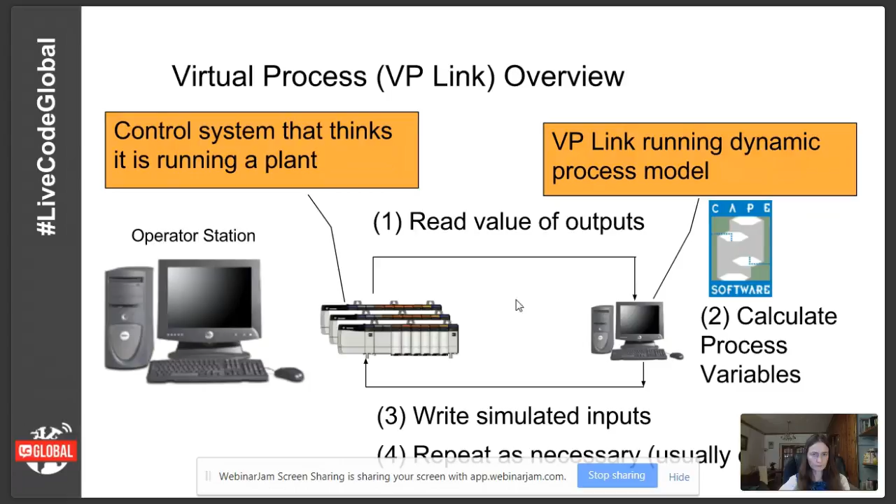So the requirements for the simulation software is, first of all, we need some sort of graphic capability, because the users who are perhaps operators or engineers are used to looking at a graphic that represents their facility. And so the simulator, if we can replicate that graphic capability, that would be a great thing as well. But of course, every project that we do is going to be different. Everybody's going to have different graphics. We're going to need to be able to draw different types of processes and drag the live values onto a different place.

And the other thing, of course, is that it's going to need to talk to the automation system. And back in the day when I first started, generally that meant we just need to talk to something over a serial RS-232 link. But now, of course, almost everything talks Ethernet, various protocols over Ethernet. But we still need to be able to add in some functionality to do that behavior.

Right, so when I first started thinking about replacing these light and switch panels, I thought, well, we need a user interface. And in fact, we had just finished up a project for someone else, and I was looking around for a way to rapidly build a sort of mock-up of what the final software might look like, in order to experiment with how the user interface would work, how we could talk to the automation system. So back in the late 80s, I was looking for a prototype software, sort of rapid application development environment, and sure enough, found it.

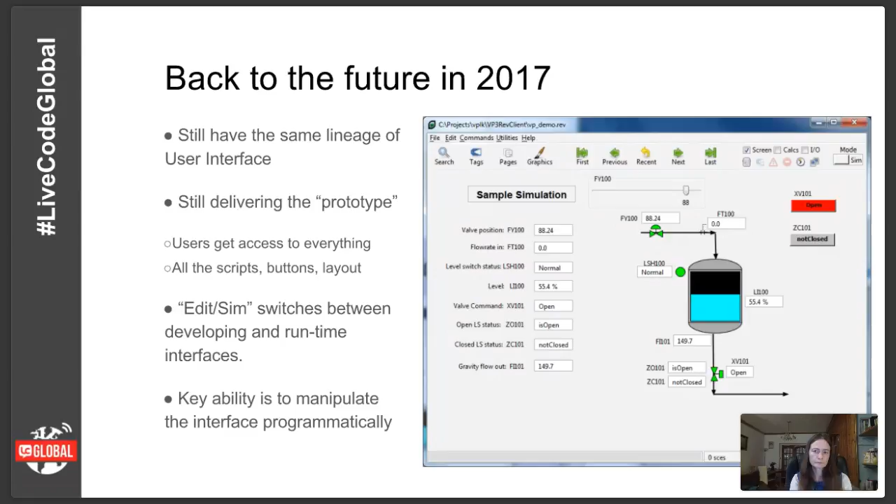We have lots of scripts that will completely redraw the user interface or take a file from some other format and replicate that format within LiveCode by just effectively redrawing it and repopulating it. So this model has actually been very successful for us in terms of how we can deliver changes very quickly to the customer.

In 2017 now, and I guess this has actually been around for 10 years now, so I shouldn't say just in 2017, but the architecture of the VPLink software has been split up into various components, all of which can talk over the network.

So the graphical client is the LiveCode application. And there's a VPLink server, which pretty much just holds a database of all of these simulation tags that we have. And then we need a few other things floating around to be able to actually communicate the values in the database to a particular control system.

But I've been very happy in that we've been able to really extend the LiveCode graphical client interface with the externals functionality. And we've put quite a bit of functionality in there. So there's the CORBA interface, a remote procedure call mechanism, standardized for a while. It's probably not the simplest one to use, but it does work very well in cross-platform applications.

And we've been able to take basically the whole client side of our CORBA interface and embed that into the LiveCode environment with our little external that we have. We'll get into a live demo here in just a minute or so. I think just a few more slides so we can actually see all of this stuff in action.

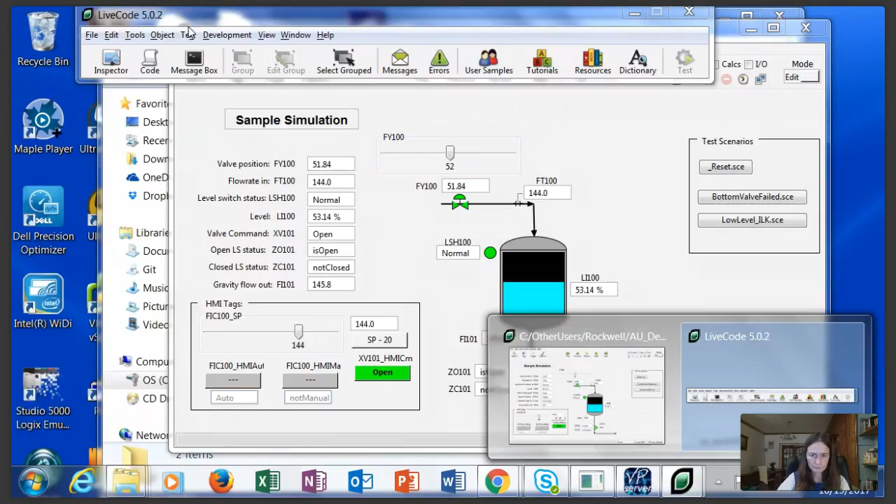Okay. So we have a simple user interface here. And as I mentioned before, we're in sort of the runtime or the simulation mode. But with a click of the mode button over here, the user gets access to the familiar set of tools, including the drawing tools and paint palette, which I believe is just off the screen at the moment.

But now, of course, we can manipulate the user interface as you normally would within the developer environment, but switch back to the browse tool, and the user now effectively thinks that he's actually running the application, which of course he is. But we've just hidden the developer tools and are still just running the same application here.

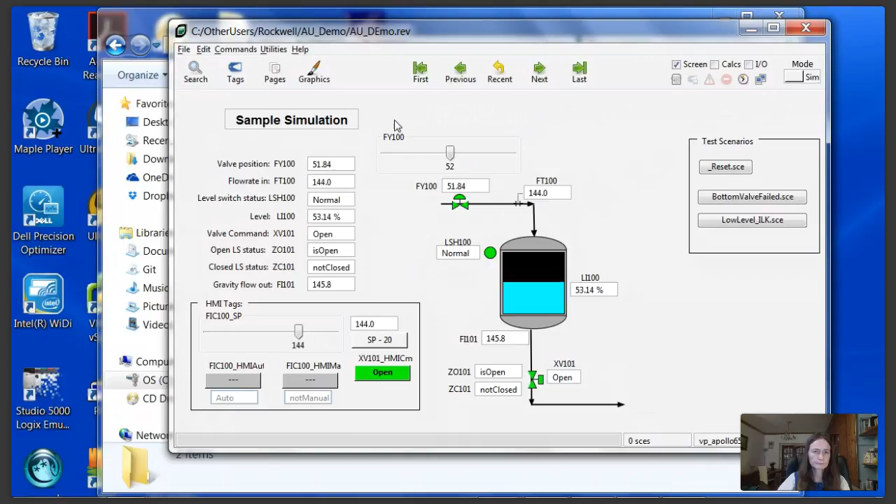So each simulation has a number of simulation tags. This little panel, the search panel, queries the database and finds all of the tags that are available there. And when the user needs to adjust or add a new tag, of course, it's just a simple drag and drop for him there.

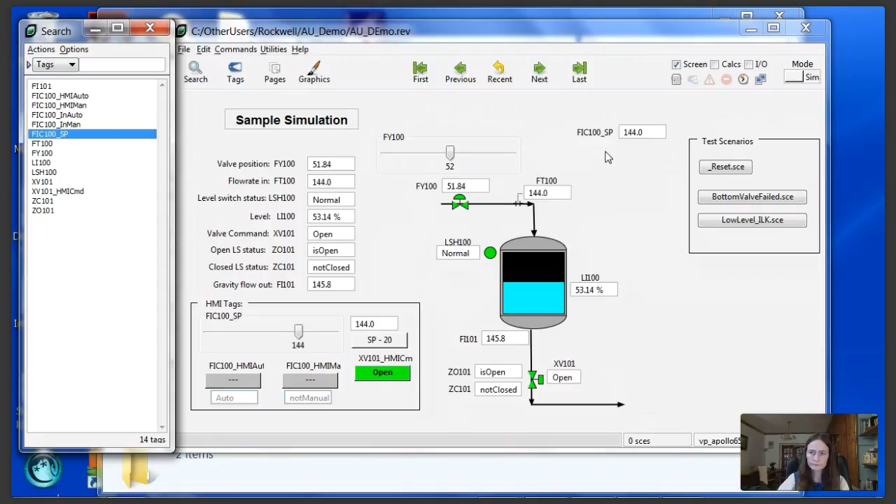And typically, I mean, this is a small simulation with just probably 14 tags or so. It's not uncommon to have many thousands. The largest simulation we have, I think, is 60,000 tags. But 2,000 to 5,000 is a typical number. And a lot of times we just might want to see all of those tags on a particular page.

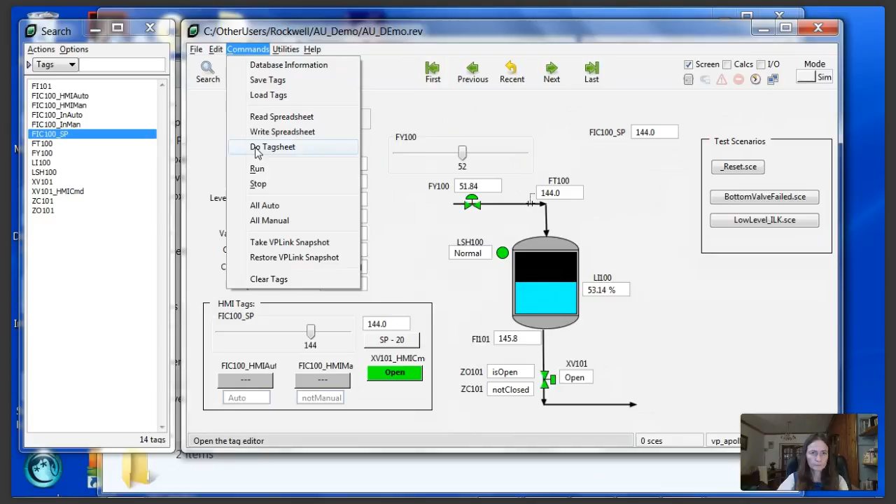So there's a command here that we use, this do tag sheet command, which will just take all of the tags in the database and lay them out on the graphic. Now, when we have 14 tags, of course, it just happens immediately. But if we had 5,000 or 6,000 tags, this page would get full, and we would then need to create a new page and populate those with all the fields.

And what we found is that if you do that, it's kind of fun to watch the fields be created, but locking the screen is quickly deemed very appropriate because you get tired of watching the screen being created dynamically after about 10 seconds. But even locking the screen, which helps with the time it takes to create them, still takes quite a long time for the number of tags we have.

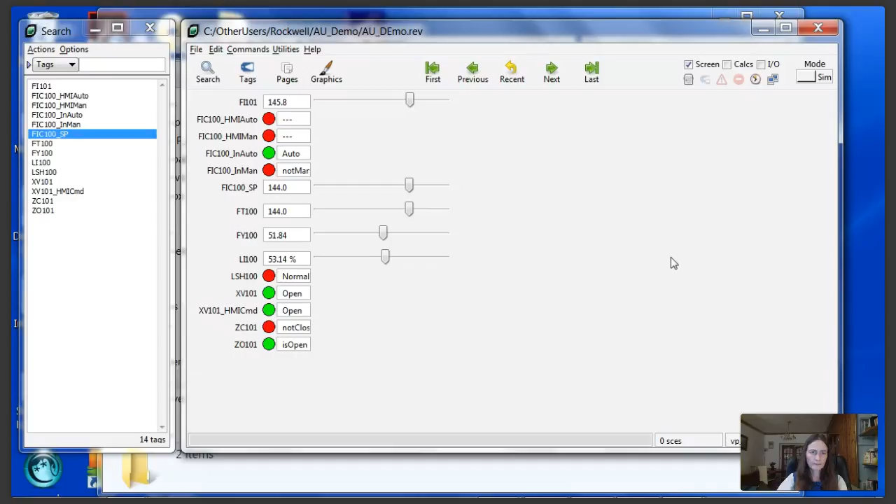So we've employed, I think, an interesting technique where we will build the new page, but rather than populate all of the tags on the page, we'll just insert a script into that page so that the first time we go to the page, it will then populate the page and lay out all of these tags and these values.

So if we end up having to create 50 or so pages, we just make the new page and insert the script so that the first time we go to it, it'll get drawn and created. So that delay in when we actually do most of the work enables us to speed up the user interface quite a bit from that standpoint.

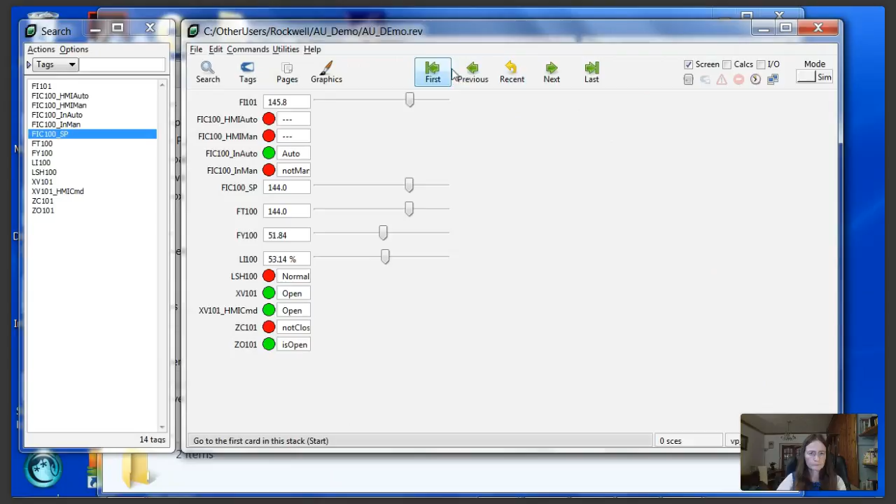And of course, if I switch to edit mode, then we can take a look at all of the scripts that we've put together. And the idea for how we deliver this is there's what we call the starting point, or the virtual process blank. So there's a blank template that has the major features of the software: the navigation bar, the status bar down at the bottom, and a first page that allows people to get familiar with it when they first open it.

But we deliver this VP blank, which becomes the customer's simulation file, or their project file, as it were. And we would just save that as a different project name if someone starts a new project. But of course, there's lots of shared items that are used throughout all the different projects. For example, everybody has this search window. All the projects have a window that will show the details for a particular tag. And there's lots of different utilities that are all common.

So the problem with delivering a blank application and then having the user customize it is that when he goes to upgrade that application, he may need to upgrade all of his stacks. And so we've tried to take all of the common points out of the actual project stack, and they all end up going in a separate library stack. And that library stack then has all of the common functionality for the bulk configurator or the scenario manager, and all of these typical things that are common to each of the VP blank projects.

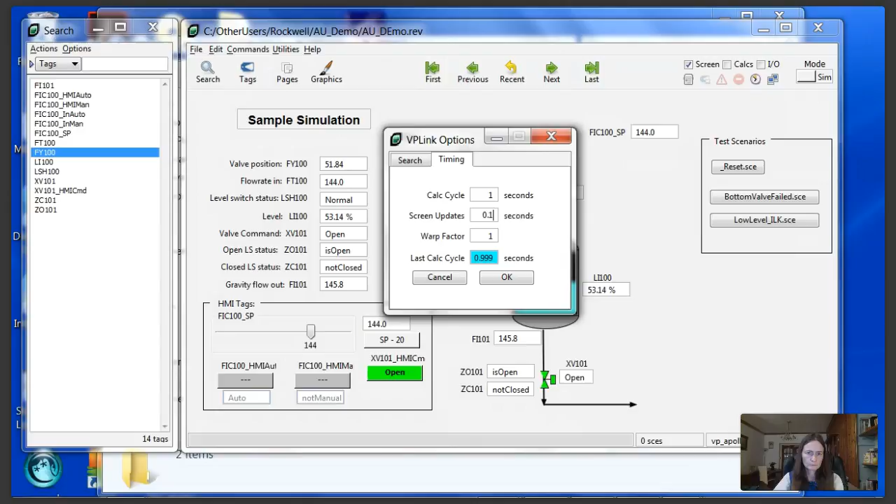Now, we've actually found that the LiveCode scripting engine is very fast, and we can generally update the values on this graphic faster than the actual control system itself will update graphics. So most control systems these days may update at half a second or a little quicker than that, and it's very easy for us to set our screen update. You see here it's 0.1, but we can easily go down to a tenth of a second or even much faster than that to show these values very quickly.

Just a little bit on the simulation side, we can see here, I'll play the controller, and as the controller opens up the valve, you'll see we'll get more flow that goes into the tank. And as the tank level goes up, there's actually a gravity flow sort of algorithm that's calculating the flow that's leaving the tank. So all these values would be communicated back to the control system, and typically we would do the debugging there. But it's nice to be able to intercept a value.

And if we have to, for example, force something that happens in the field that's a result of some sort of equipment failure, we can take care of that. So in this case, I can just close the valve, even though it wasn't commanded to be closed. And at this point, the level will just start to fill up until the operator sees that there's something wrong, and he's about to put beer all over the floor. So he should then take some action to mitigate that.

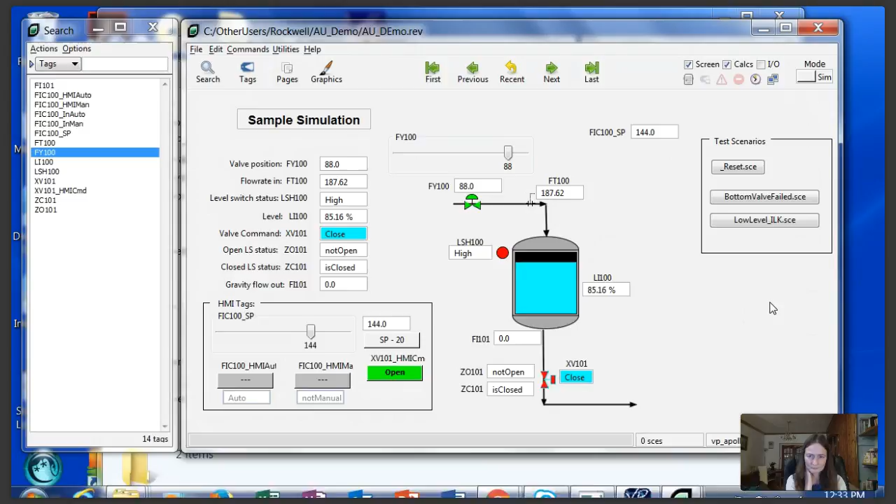One of the things that we found somewhat surprising from our work is that this is quite applicable to a variety of industries and different types of processes. Right now, we actually maintain a training simulator for a consortium of companies called the Marine Well Containment Company. And they were formed, if many of you might remember, after a spill in the Gulf of Mexico a few years back, the Macondo incident.

And at the time, it took well over a month for the industry experts to mobilize the equipment to get out to the Gulf of Mexico. And part of that was because there were different companies involved and so forth. Well, the government got involved after that and pretty much told all of the oil company operators in the Gulf of Mexico, look, you guys got to figure out a better way to do that, or we're going to figure out a better way to do that.

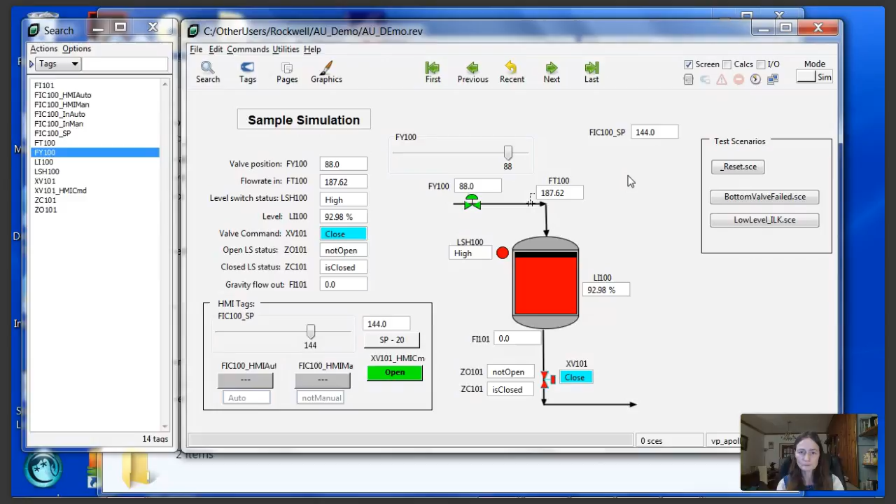The companies got together, formed this consortium, and now the consortium maintains equipment that's on standby, ready to be ferried out to wherever in the Gulf of Mexico just a few days after, in case there's another accident. Now, the equipment is hopefully never used, but when it does become used, we need to put that into service right away. So as part of that requirement, a training simulator was very important to the consortium, and they chose us to deliver the training simulator for them.

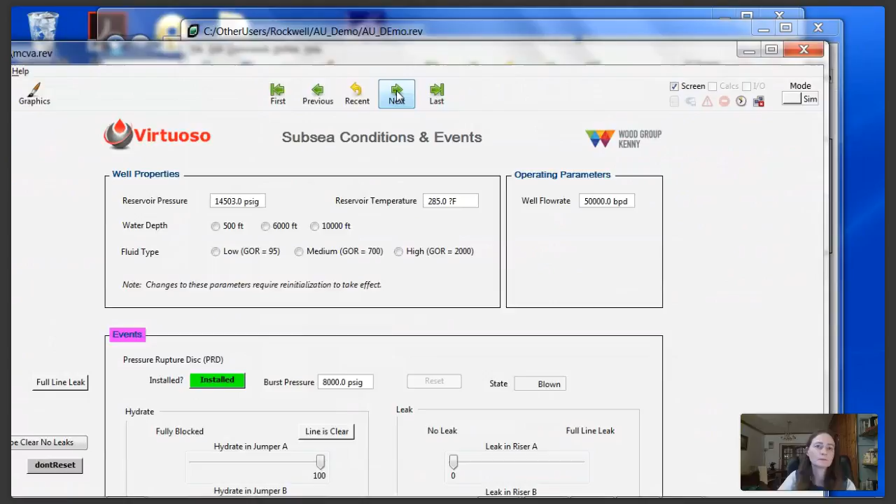I've got part of that application here. Let's see if I just close these other windows. Here we go. Get away. There we go. I'll jump over here, and so this is a typical graphic that the instructor would look at, and you can see there's quite a detailed representation of what's going on in the process.

The consortium takes operators from the member companies, and they operate sort of like the National Guard does in the U.S., where every 2 weeks out of every year, you will show up for the appropriate training in case you need to perform the role of a National Guardsman. And so the member companies work the same way. They send their operators to the Marine Well Containment offices where we have the simulator running, and they practice running the equipment.

Even though you can't actually run the equipment, because all of the equipment is sitting in a shipyard, not connected to anything, ready to be loaded onto a ship and taken out to the Gulf of Mexico. But with the simulator, the trainees can actually train on how to use this equipment, so that when it does come to use it, on day 1 or day 2, they're very proficient with how that works.

One of the interesting things about the way we developed this interface was, in this particular case, if I switch back to the edit mode, you'll see this is locked. Let's unlock that.

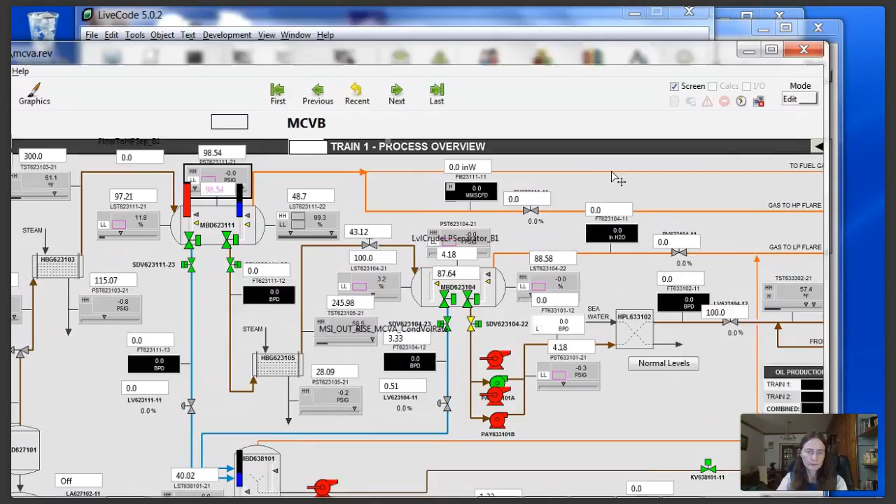You'll see that what I've done is basically taken a bitmap image from the actual control system, and that's what I'm manipulating here in the background, right? And we take that bitmap image and import that into the software, and then we use a LiveCode script to go interrogate the graphic file in its native format on the control system.

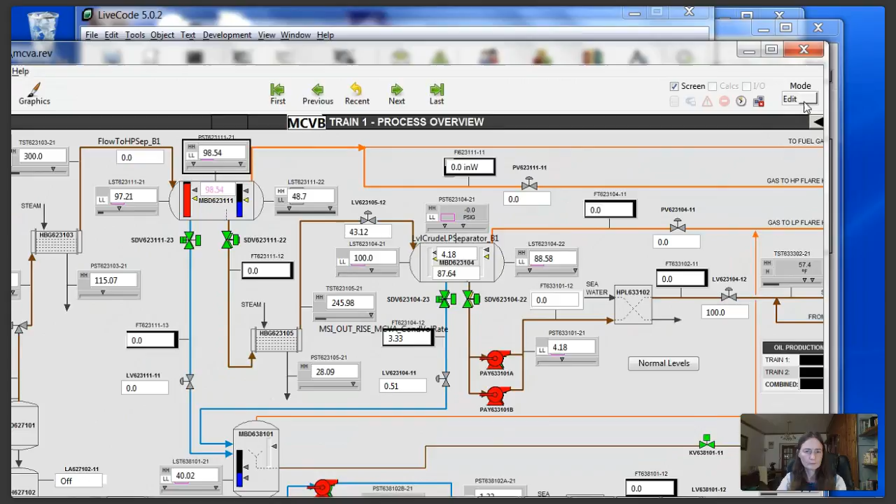These days, that's typically XML or HTML, but we interrogate that to figure out where all of these values that we overlay on top of the bitmap go, and then we can overlay the live values on top of the static bitmap, and of course the LiveCode gives us a way this is somewhat automated

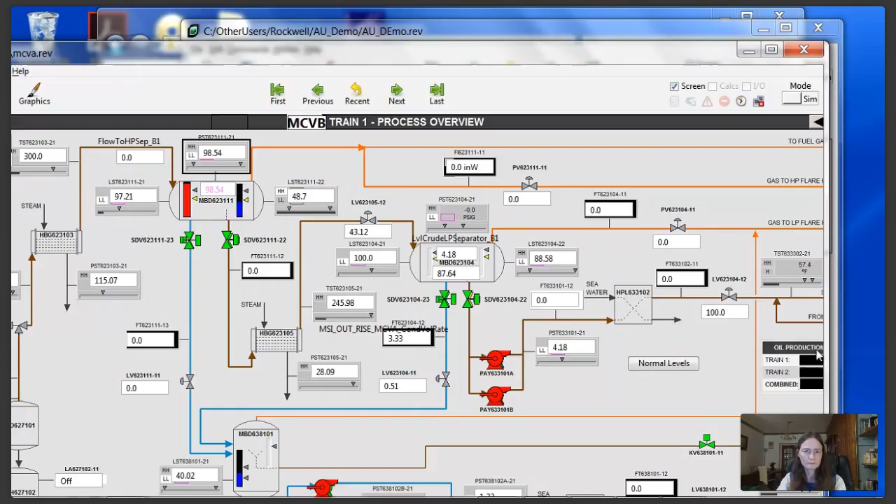for various control systems, so that we can automate taking the snapshot on the control system side, save the bitmap or PNG, and then interrogate the graphic file, and then use the LiveCode script to lay out and manipulate and build our user interface very quickly. So if I page through just some of these, you'll see that there we have lots of different graphics with that particular format. That's awesome.

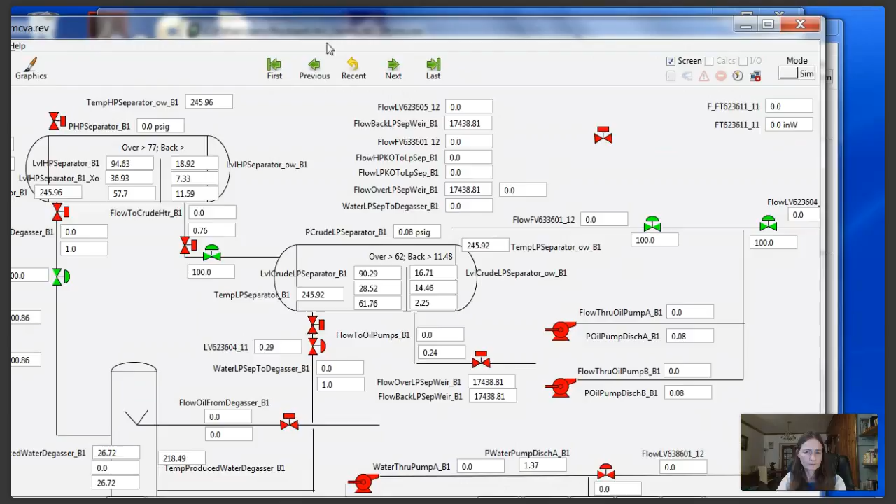Can I just interrupt you for a second, Winston? Sure. We've got a couple of questions here. All right. So first of all, Mikey was asking, what did you do between HyperCard being abandoned and picking up LiveCode? Well, I think I've told him the answer, but you confirm this. Yeah, so we were forced to live on the dark side for a little while, and we used the Toolbook product in the meantime.

Oh, yes. So Asymmetrix Toolbook had basically, I think, cloned the functionality of HyperCard, and we used that quite extensively through, let's say, the late 90s, and into 2000. I think they were a very successful company, sort of leveraging that. I know that when we started, we could buy a copy of Toolbook for $200. And when we finally abandoned that and went back to our roots and LiveCode, I think their product was up over 3,000.

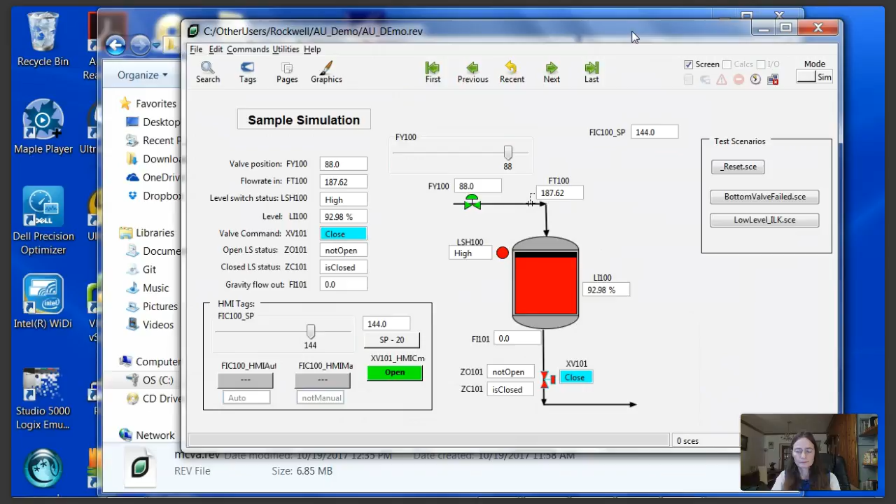I think they did make a successful run and still do, as far as I can tell, on the Windows side. But other than some vocabulary differences, anybody that looked at Toolbook would obviously see the HyperCard roots there. Yeah, we did pick up a few people from Toolbook as well. I remember that now. Yes.

So another question here. Hang on. I saw that. So Clarence has asked, do you keep trend logs so that your user can go back and see what's happened over a given time frame, maybe for troubleshooting? Yeah, so we do have trending functionality. The trending is, of course, built into all the control systems, but we do have a little trending. I call it sort of the poor man's trending.

And under the hood, we just have this sort of graphical interface, which if I locate, I don't have, no, the new machine. Essentially, this is a front end for gnuplot, right? The gnuplot trend builder. And what this little faceplate does here is the locate finds the version of gnuplot that you have installed on your machine. Of course, I haven't updated this machine with that.

But once you do that, then let's see, we can probably actually see that if we take a look here in the script. See if it's in the card script. So there should be, see if there's an update in here. Save trend. Okay, so here's where we're opening gnuplot, hiding the console window, update backgrounds, right? So the way we do that is we essentially open a pipe to gnuplot from LiveCode.

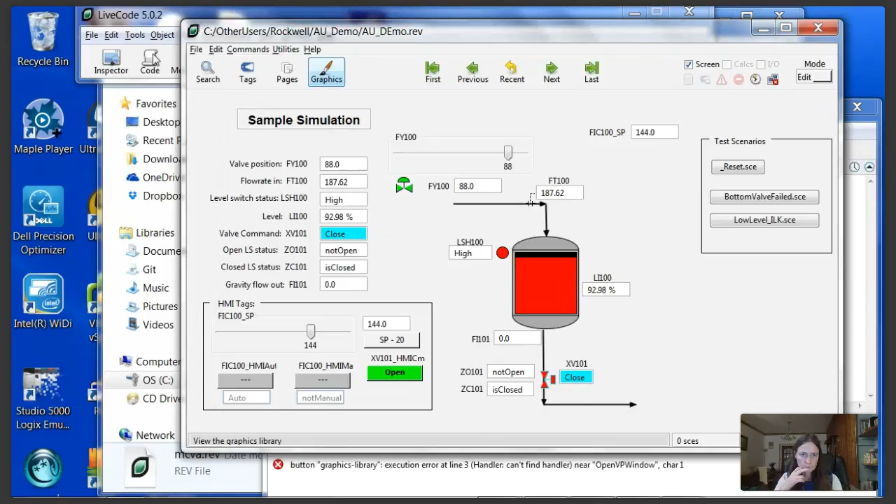Most of the button or the graphic objects that we have here, there's actually even a little graphic object editor. Hang on. That's built in here. Oh, it seems to have gone off the page. Oh, no, I got to get back to sim mode, of course. Tools. Get over there. Oh, so I think, script editor maybe? There we go. The graphics editor is sort of just a built-in tool to actually create groups. And of course, it just relies on the edit group functionality largely from within LiveCode. So that's how we would create different graphic objects then that the user would put out.

But in the 8.02 version, the whole graphics mechanism, we've been looking forward to that rewrite for quite a while now, and we're actually busy updating all of our graphic libraries and such like that, so we can take advantage of the LiveCode Builder and what we can do with that with 8.02.

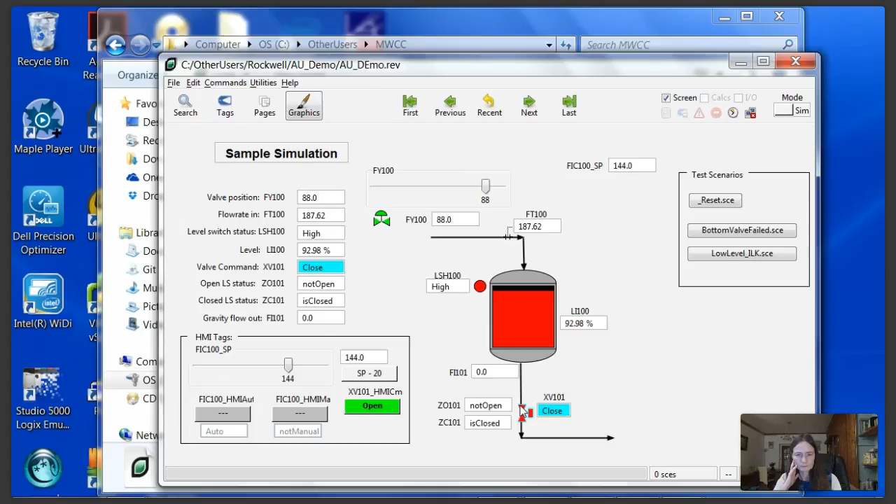Was there another question, Heather? Sorry, I had my microphone off.

So we do have, Robert said, so you scan the graphic and the LiveCode script finds and populates the proper areas. Yeah, and mostly that's an exercise in parsing XML or HTML. For some control systems, we'll have a little external helper script. Because if it's not really XML that we're parsing, then we may need to bring some other tools to bear, in which case we'll look through its native database and then export an XML file, which has the key information from the other graphics.

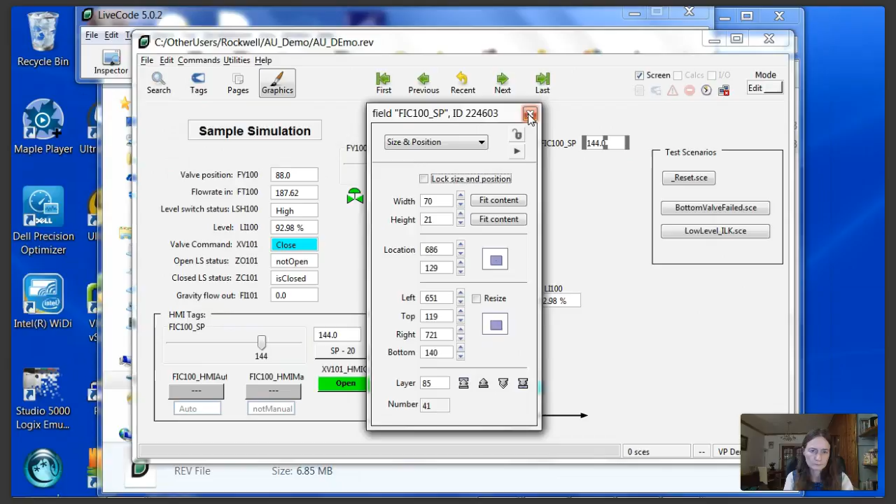And then we'll just say, oh, I need a field, for example. If we take a look at this field, I need a field called FIC100SP at the appropriate location here on the graphic. So we'll just encode that or keep that in the XML file. If we can't read it directly from the particular control system, then we'll have a little helper app that makes a standardized XML that the LiveCode will read, and then pretty much redraw the interface from there.

We did some work for Rockwell very recently, where they're upgrading from their older controllers to their newer controllers, and we actually put together a parser that looks through the control system, so that for any given output, a pump that's turned on or a valve that's turned on, we can trace back through their logic to find all the inputs that would perhaps be used to influence the value of that output.

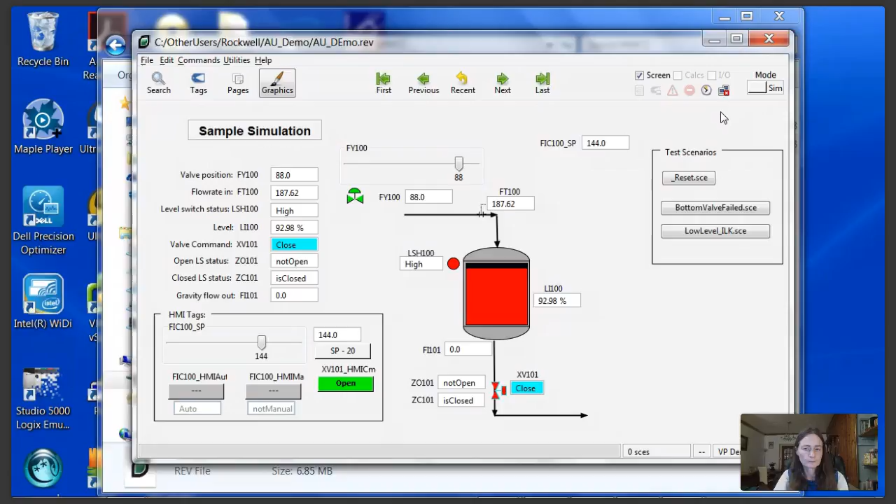And then we've built thousands of pages based on this parser output, so that we can find every single output in the control system and build a page that has all of the inputs that are associated with that. So this would be our template page for that, where you'd have a certain set of outputs and then a whole list of inputs. And then, well, not very quickly if it's a large file, but at least now you have a chance to see what inputs are affecting your outputs, and do a much better quality test of the logic before it goes online.

I tell you what, Heather, let me jump out of the demo, just a few slides at the end. If there are other questions, we'll have some time to get those. But I just wanted to jump back to my notes real quick to see what else we had. We got through that.

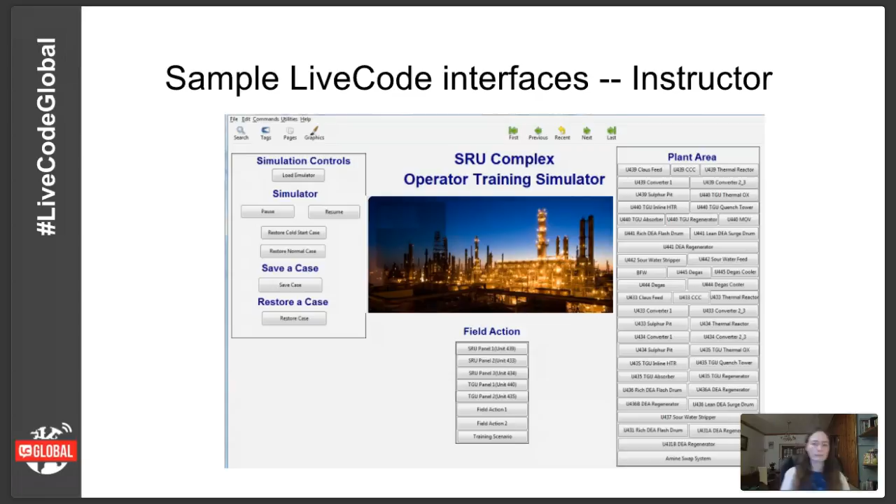That was a huge win for them. They're not saving a whole lot of, that's not a sort of direct dollar cost, but for a large company, and I think especially Chevron, the environmental benefits are very, very important to them.

Although this one wasn't automatically built, we do have inside of VPLink a gas flow network, which for computer science people is basically a graph. You have nodes and you have links between those graphs. We use GraphViz to actually lay out the graph automatically and produce documentation of how our process is laid out.

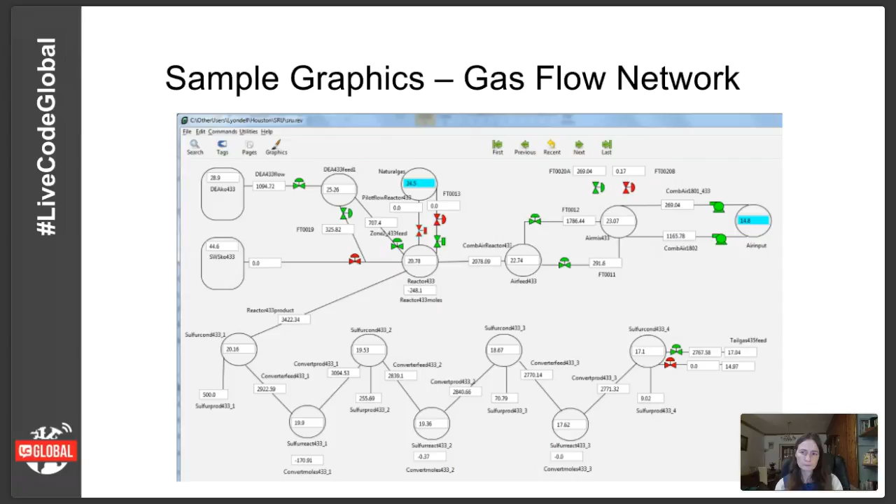But we also use LiveCode to interpret the GraphViz output so that we can automatically lay out these sorts of graphics. And all the pressure nodes are connected to the pipes with all the valves in the right spot with a little help from the GraphViz layout engine. So that's a very interesting tool as well. And so just in order to leave some time for questions, we'll get close to wrapping up here.

So what's happened to this little garage outfit, right? I told you I've had the same title for just about 25 or 27 years now. And we really did start off in a garage, or in sort of the back corner of my house. But since then, we have hundreds of users all over the world. The refinery that's closest to LiveCode headquarters up there near Edinburgh is a very good VPLink user. So we like to think that we're keeping everybody in Edinburgh a little safer as well.

We've worked on offshore assets in the Gulf of Mexico, Western Africa. There's a new training simulator in Brussels for Brussels Energy that's turning waste into electricity. We did a project for NASA. It was just a simulation of a crane, but it's the crane that used to stack solid rocket boosters and move the shuttle around. And my wife liked to call that project the "Don't Drop the Space Shuttle" project.

There's been some nuclear work as well. A few years ago, we tested 8 reactors in China, and VPLink was used to test the control logic that drops the rods into the nuclear reactor that causes the scram. So there's lots of duplication there, and the test plan is just absolutely ridiculously complicated, but so is the logic.